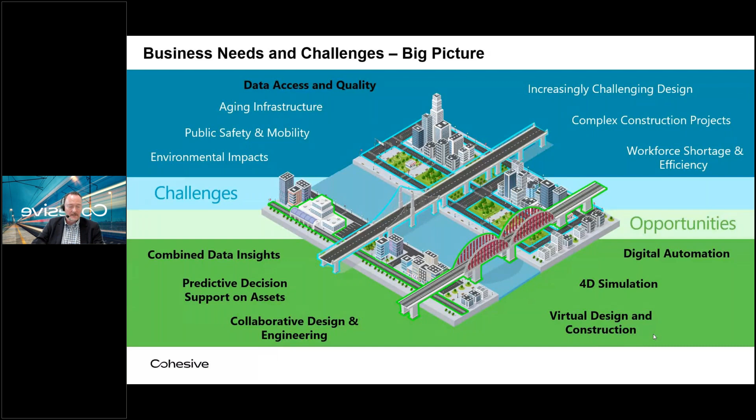So that is the big picture review. Moving into what it means in reality, infrastructure management business needs are to review inspections that create exceptions, which of course require then a plan for what are we going to do about those exceptions. Do we plan surfacing or other work that we have, like grinding, profile adjustment, whatever that might be? We need to prioritize where we work.

One of the issues, for instance, with Maximo is that we would love to be able to group work together and deploy it, but we don't necessarily have visibility into how much other work might be happening in that area at that time without it being a fairly involved process.

So if we have a simpler way of seeing what work we need to do in an area, how do we actually form that gang or that group of people to go out and do the work in an area and fix as much as possible in that area with one visit, so that again we reduce impact to service provision and we increase the hit rate, if you will, of resolving defects and issues with the minimum amount of visits. Clearly we've made an improvement.

We also need to actually use funding very wisely. If we're in an industry, of course, like we are with transportation, where it's primarily public funds, we need to use those funds as wisely as possible.

And we need to make sure that we're getting the most out of our asset life cycle. We're also getting the most out of our work return. So we need to make sure that we have all of that response in terms of correct planning, correct operation, as optimized as possible along the track.

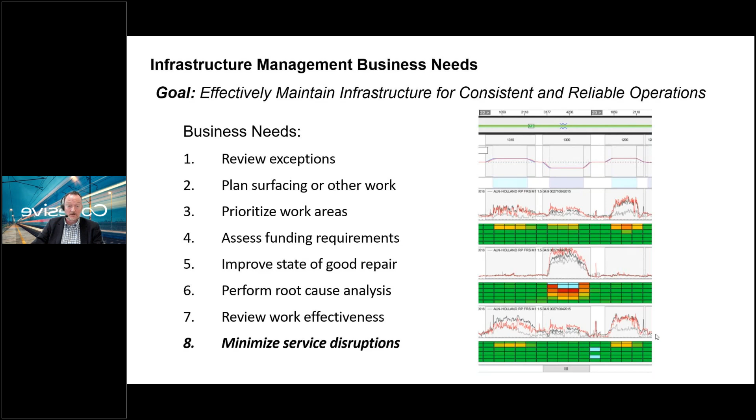We need the actual client, the customer, the paying passenger, or the freight company to be able to have the appropriate level of service from the track. So from an infrastructure management point of view, this will give us visibility.

Otherwise, it could be from geographic boundary to boundary, or it could be ownership boundary to boundary. And of course, if we have different business units managing different asset types with different costing profiles, we may have different boundaries for different types of assets. It gets very complicated very quickly.

Rolling stock is a little less, of course, complicated, but it still has complexities like configuration management and being able to assemble the assets in the right order, in the right way to make sure that we have good operation, safe operation of that vehicle.

When we're relating those business needs back to Maximo, we know we have linear assets, the ability to model linear assets in Maximo. We also have the ability to model condition analysis in terms of Maximo and MAS health, and the ability to manage safety, health, and environmental concerns through configuration management, which is ACM. Transportation and the management of wheeled vehicles provides all the information we need there, and bringing in GIS information allows us to show it spatially. Third-party management happens through service providers. So we've got everything we need, along with scheduler for capital planning, to model everything around infrastructure and linear management in Maximo.

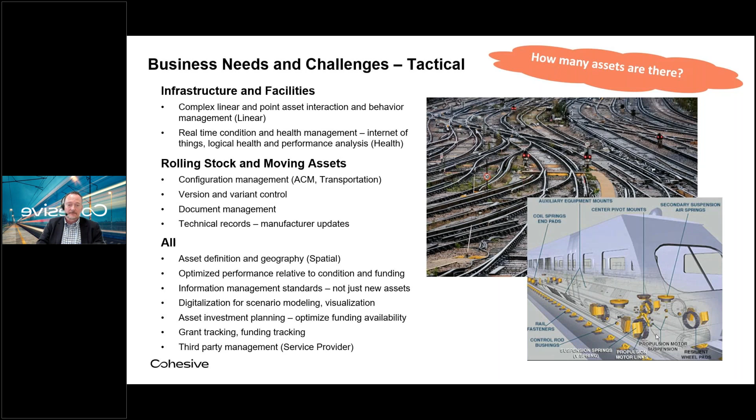Further down, we've got the linear work that we've done against the asset, so we've got the accumulation of history, and that gives us a behavior profile. But it still doesn't give us the insight into exactly what's happening to improve or address issues over time in a visible, graphical manner.

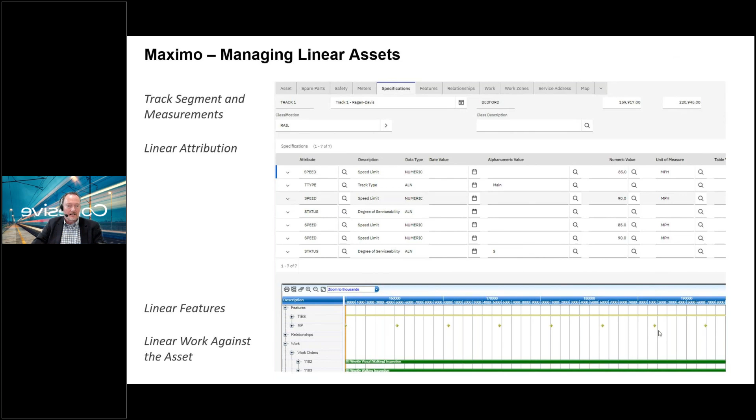When we're talking about work progress and history, we're building that up based on the number of work orders we've created in a particular location using the linear process within Maximo, to say I'm working on this feature, this asset, this area, and so on. So we have all of that information in Maximo.

Now, what happens if we have a work order that crosses one of those boundaries I was talking about before? That creates a challenge, because we have the potential for work to begin and end on one asset and then start on another, but it's continuous across that boundary. How do we model that? How do we show what we've done? Maximo is very asset centric. Of course it's got the multi-location, multi-asset table, but it can't necessarily visualize that.

So again, we're looking at potential strengths in the linear analytics tool to complement Maximo. This isn't to replace it by any means—this is to feed information into Maximo so it can be more effective, and also much more effective for the user in terms of how we're addressing those issues from a linear point of view.

I wanted to introduce this diagram to show how the information relates—this is how the information underlying the products actually merges together. So we have Maximo, we have attributes against assets, activities of work, work plans, all related to linear assets. If we have GIS information or LiDAR, we've got the definition of the assets in a geographical format, and we have the attributes there that can flow backwards and forwards between the systems, one geographical, one asset management.

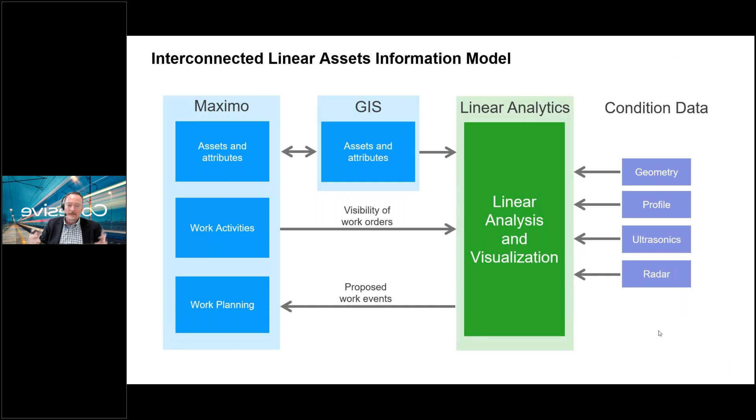Then we have history on both sides. We've got the history of the condition over time, and we've got the history of what we've done about that condition over time. That will give us the profile of now we can justify funding to change that profile, change the way that we address that track segment over time, maybe with a redesign, maybe with a change of maintenance practices, maybe with a change of operational utilization. There are many options, of course, in just making the data visible to us.

So, as an introduction to what is linear analytics, it is a tool from Bentley that, of course, Cohesive is very expert at implementing alongside other implemented tools such as AssetWise, and it's part of the AssetWise brand of products. So its full name is AssetWise Linear Analytics. We call it linear analytics. It used to be called Optram many, many years ago before it was procured by Bentley, but the principle is the same. It looks at a graphical depiction of the track.

Any kind of linear asset can be reviewed and recorded. It doesn't necessarily have to be track. It could also be overhead catenary, or it could be wires associated with the track, or it could be the tunnel itself. So there are many ways to model, if you like, a linear asset and its condition as you're progressing through that linear asset.

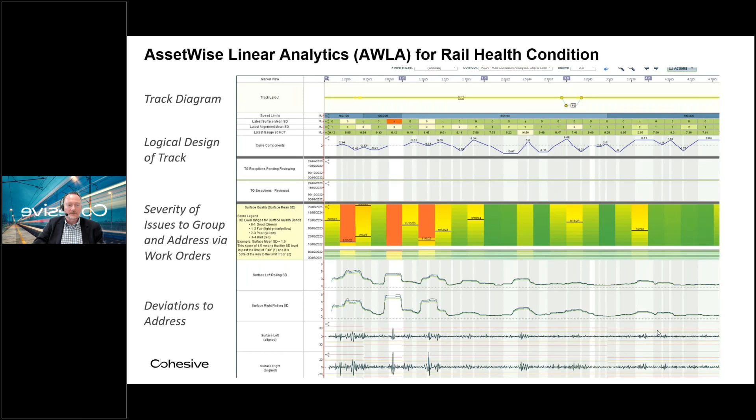So this is everything that linear analytics would show. It's much more detail, of course, than it would be in Maximo and in meter readings. And of course, it already contains a visualization, so we don't have to create complex reports or other output to be able to show exactly what this means. Now the trick is to combine that with the work management side so that we actually see the connection between what we're seeing in track condition and what we're actually doing about it. And that's where we come to the next step.

So where we have a work location highlighted clearly by a hotspot like we've got right now, we also see in blue the work events that were created in the past. And those work events can be, of course, related to the work orders that we have created in Maximo, and that would give us the connection between the two tools.

So hovering over that work event should pop up a nice Maximo box, which tells us which work order on what date, covering what territory, and what, of course, was done, and allow for a link and a movement back into the detail in Maximo, and then, of course, back to the track chart here when we are looking to do some more work in linear analytics itself. So we have a view that's now combining both products together. Ideally, we would see that together in one actual image on the screen embedded into a Maximo frame so that we would have that seamless movement backwards and forwards.

In terms of then work planning, this is an example that I wanted to show here. We're looking at very specific things on the screen. So at the top, again, we've got the logical depiction of the track.

You can see here we've got rail crossings, those vertical bars as they go through the green line. We're also looking at work events, as you can see in the middle of the screen, and that progresses by time. If you see the timeline on the left-hand side, we're moving up. Yes, it's a few years ago, but the principle is we're showing the actual progression of change in the track over time based on what we're doing to it. And that's what we want, is the visibility.

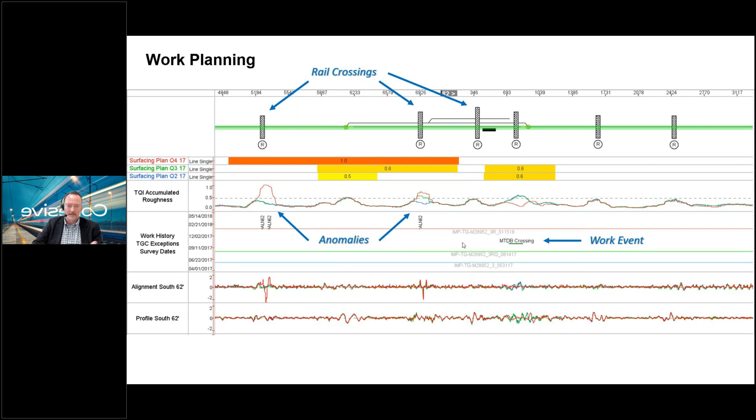So if we only have 4 hours access to the track, we better make sure that those 4 hours are extremely effective. And we get rid of as many of these anomalies as we can, primarily because, of course, we don't want to cause work to be delayed. We don't want to cause disruptions in service either, because this is going out of tolerance. But we also want to make best use of the track and the time that we have so that we can make improvements elsewhere. So that's what this linear analytics diagram is showing here, is the combination between work events, the improvements that we've made over time, and then, of course, the visual representation of that condition.

We can actually see, though, as well, if we have a look here, the deteriorating track quality. So linear analytics doesn't just do a picture of a point in time. It can show, of course, a progression over time, like we saw in the last slide, but in this case, I'm showing it slightly differently.

These are readings that are being taken on a frequent basis as each geometry run is done by the operating company. And this could be every 30 days, it could be every 2 months, it could be 6 months, depending on what the actual gauge of the track needs to be, or the class of the track even. That will determine the frequency of inspections. We need to get the information back into something that's showing us the actual movement of the track quality over time.

This one is highlighted specifically because you can see from bottom to top, as the readings are progressing, it's getting progressively worse and worse and worse. And then we get to that point again at the top of that red line where we have done the work to fix it, and then you can see we actually are in a much better place where we're getting no bad readings, except for a single blip. You can see right here in the red.

That might not be a systemic problem, though, as a deterioration. It may just be a one-off that we can fix, but we seem to have fixed the root cause that was causing this deterioration over time. So we're seeing everything that we can about the deteriorating nature of the track, but we want to be able to connect that to Maximo.

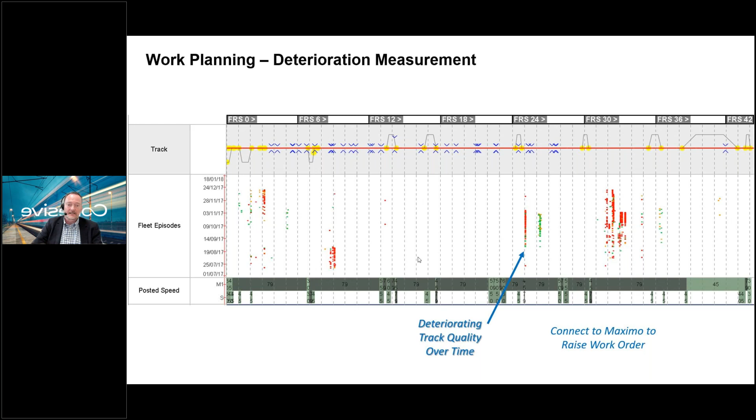For instance, Amtrak are using it to capture speed ratings against a track. And that would be determined based on, of course, the profile of the track and the curvature and the vertical alignment of the track. And of course, the distance to the next railroad crossing or the next station. Many things to think about, but they've got that all planned out, and being able to put that in linear analytics and show it alongside the condition of the track will help us then determine, again, where do we do work? Minimal disruption.

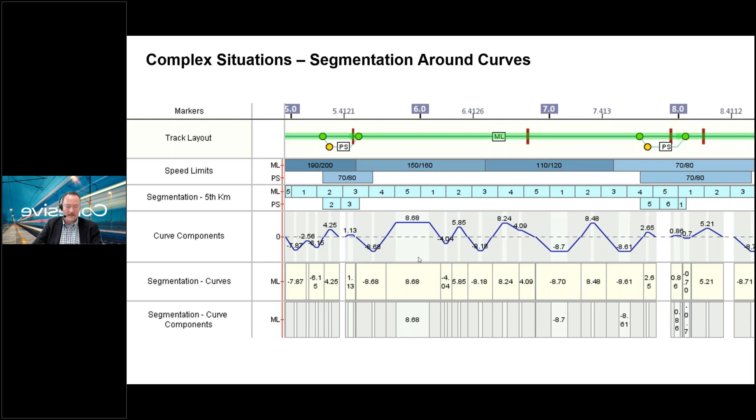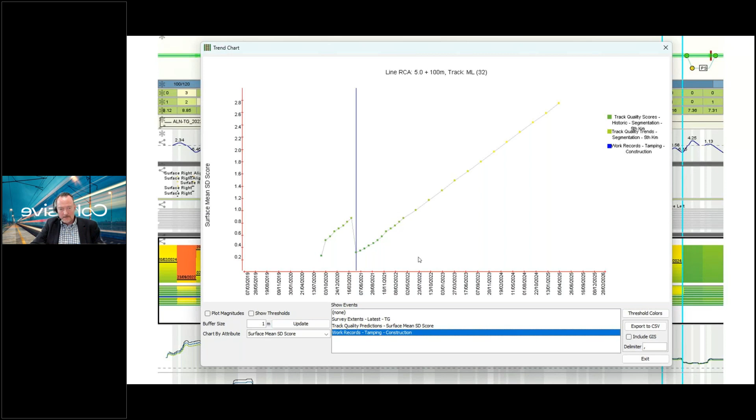And at some point, of course, it will hit a trigger point where we absolutely need to react. But we don't want to just react when it's got bad and provided a rough spot and provided a bad experience for the traveling public or the freight line or whatever the track might be used for. We want to get to a point where we are maintaining it over time so that it doesn't get bad, it doesn't cause an issue. It is a seamless, ongoing maintenance of the track so that it can perform at its optimum.

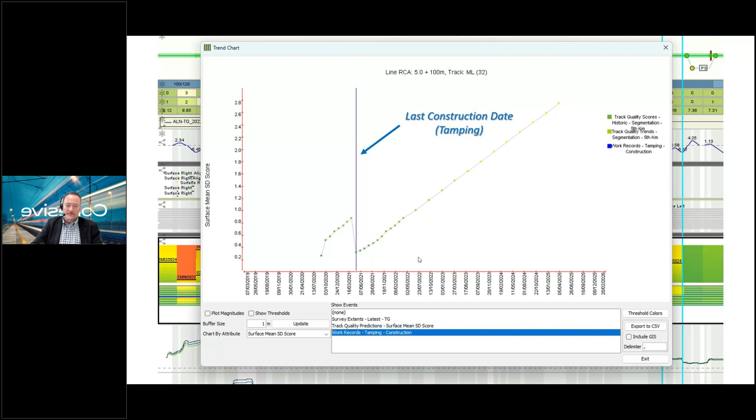So if we have a look at when we did the last construction date, and that was tamping, you can see the improvement that we made. Obviously, it didn't replace the rail, but we have a Maximo work order that we're connecting to be able to say that that occurred, and we have the history associated with that construction event.

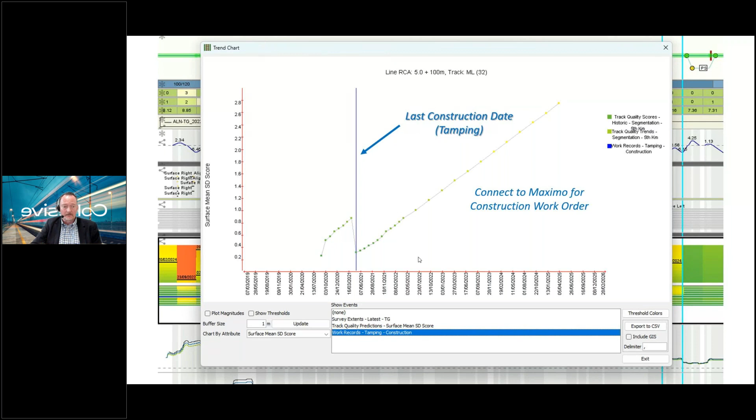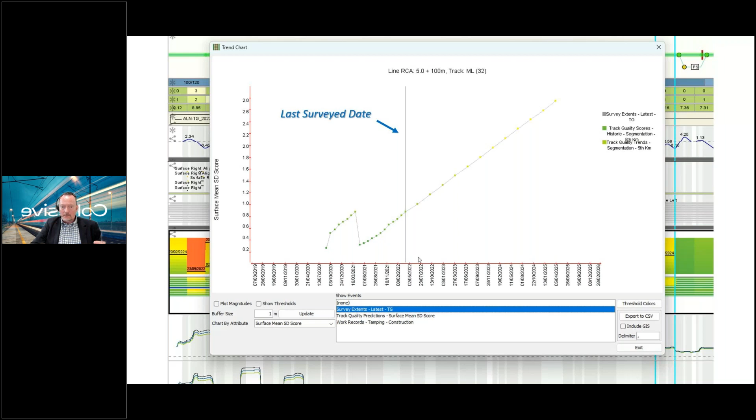Next thing along the line would be the last survey date. So after we've done that construction, we do another survey. And that might be, again, on a regular basis based on inspections. But it will tell us what that last survey date indicates in terms of a deterioration rate for that track. And of course, we have a connection to the Maximo work order for that inspection. So we have the connection for the work that we've done against the track and also the inspections that we're doing, put the two together, and then we have that forward-looking vision of exactly what we are expecting that track to need over time.

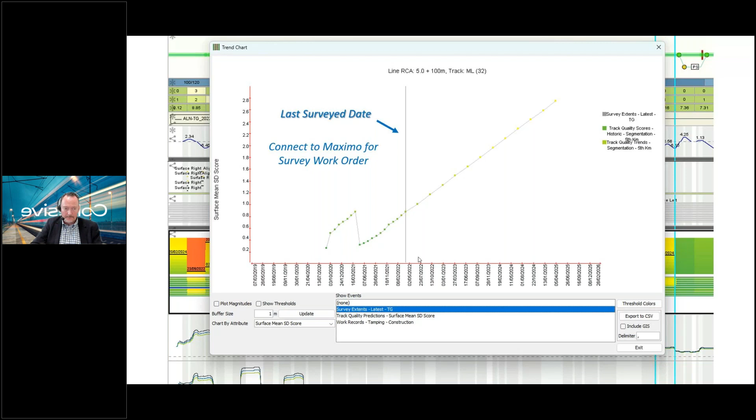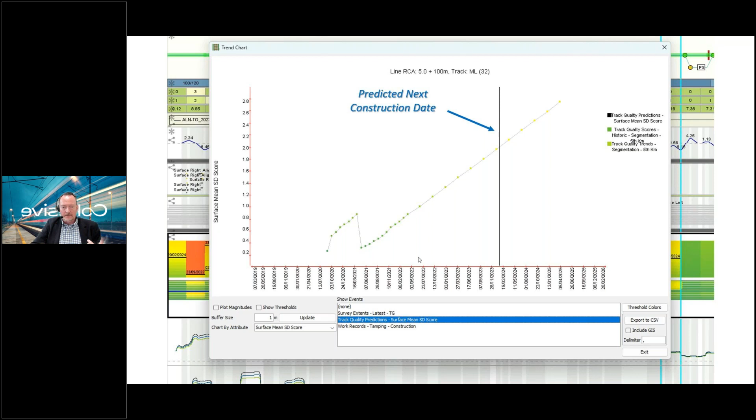We can also then, of course, predict when the next construction event needs to happen. We might actually be able to get away with not having to do tamping for some period of time, but also we might think about, is tamping really the answer if it didn't fix the actual root cause of the issue before? So are we looking at tamping, or are we looking at a redesign? Are we looking at different rail weight, different ties, different clips, whatever it might be? Again, we've got to have the information, and then we relate it back to a Maximo work order with a plan to show us exactly what we need to do. And that, again, contributes to history.

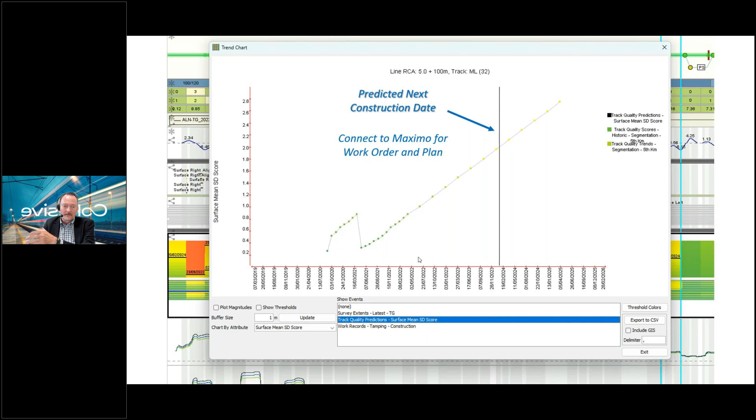So linear analytics will give us an actual profile of what has happened, and then of course what will happen to give us the best decision making power to be able to say, how am I going to manage my linear asset? Ultimately, what we want to do is to be able to get to this point, which is I want to be able to see everything related to a track in one screen. I want to see the profile, the condition of the track. I want to see hotspots. I want to see areas that I need to address, but I want to see it in real world. I don't necessarily just want to look at it in lines on a chart. I want to be able to see how it's related to how I access that track.

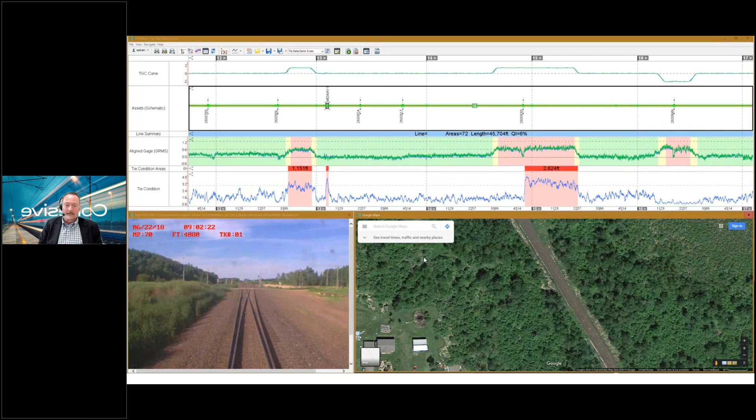This is intending to provide full visibility so that we have the ability now to do work in an efficient way and keep the trains running as well as they can. And of course, use the funding that's available to us in the best fashion possible. So that allows us to do more with less, and that is the underlying principle. So that is the reason for considering linear analytics alongside Maximo. We're trying to get to the point where we have seamless, integrated, optimized linear asset management.

And like I say, that doesn't have to be track. It could also be catenary. It can also be wires along the track. It could be communications and signals. Whatever other thing might be affecting the infrastructure of moving a train through an environment. Clearly, we need the connectivity between linear analytics and Maximo itself to be able to capture that work history.

And that's exactly what we have here with the two products combined. We have the information about exactly the anomaly that we're trying to address or have addressed. We know the root cause now as to what's causing that. We can capture that in Maximo for history, and we can show it in both places.

This is where we actually have that information now that provides us the visibility and the wherewithal to be able to say, how am I going to now improve service? And that's the summary, Natasha.

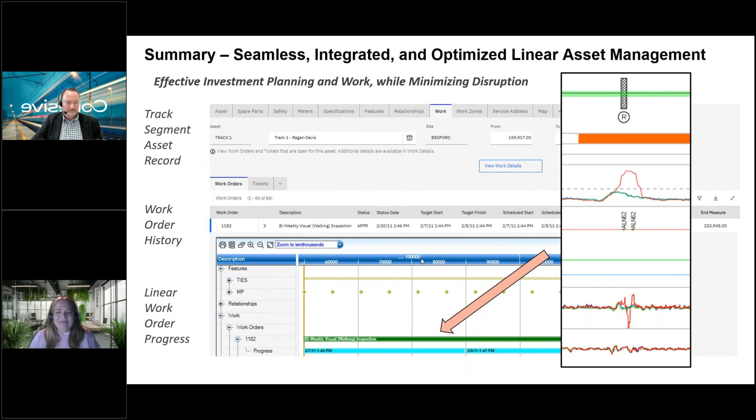Thank you, Greg. That was really very insightful. Based on conversation amongst our teams and clients, these are the most frequently asked questions that we believe would add some value to today's webinar. Firstly, how does the geometry and other data get populated in linear analytics?

So what tends to happen on a rail operating company is that they will run a geometry car, whether that be dedicated or through passenger enhancement, let's say, of a vehicle, and that will capture all the information in a database. That database then creates a CSV or other basic file of multiple hundreds of thousands of readings that would need to get harmonized and then populated into Maximo and into linear analytics, because we need the visibility on both sides.

But for linear analytics itself, it simply brings in all that information from the geometry car, from the Sperry car, from the gauge, from the other inbound information sources, and applies that into its database. And therefore, we have the latest very, very small increments of information as we move through the track. Linear analytics is the best place for that information to stay, because of course it's at a very, very detailed level and will show us all of the anomalies at the detailed level.

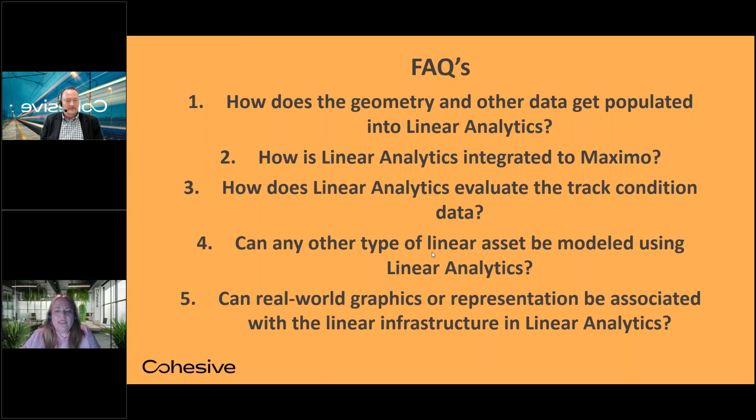Perfect, and I think we have one last time for one more question. Can real-world graphics or representation be associated with the linear infrastructure in linear analytics? Sorry, that was a big question.

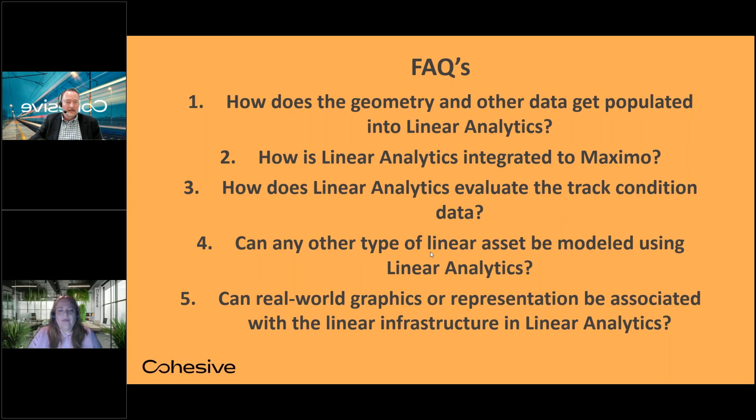Are we at a point where we know everything about the track that needs to be focused on? Of course, we can use advanced modeling as well to find those anomalies, so we're not just endlessly clawing through multiple hundreds of thousands of events. We can see opportunities for improvement by looking at the anomaly, looking at the exception, and then we get a good picture of the track in real world view in context of how we would get to work on it, but we also get the detail of exactly what we need to do to the track.